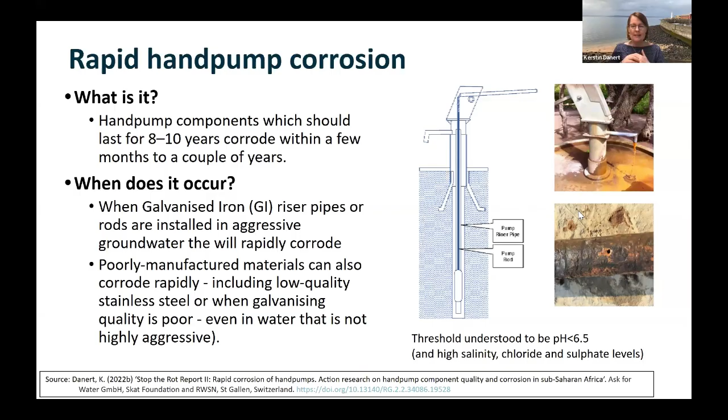And you put this so well, Fadzai. This problem has been around for a long time. It's a persistent and a pernicious problem, a problem that just doesn't seem to be going away. And we've had this in Africa and other countries for decades. In 1987, the late Saul Arlosoroff, working for the World Bank, with the hand pump project of the decades, concluded that this was a widespread and a much more damaging problem than people had thought.

That was in 1987. And also in 1987, the late Otto Langenegger did some phenomenal work. He estimated that about two-thirds of the breakdowns in parts of Ghana were because of corrosion. And he reckoned then that about 30% of hand pumps in Niger and southern Ghana were rarely used or were abandoned due to this high iron. And of course, people end up abandoning those sources.

Now, the Berlin Wall came down 2 years later in 1989. And that is me at the Berlin Wall not doing a very good job. It wasn't a very strong hammer, but it was a long time ago.

But this is still going on. So the wall's down. We no longer have this Cold War scenario, but we still have the corrosion problem. If we go to the next slide, please. So where is it a problem? In my publication from 2022 for Stop the Rot, over 20 countries in sub-Saharan Africa were documented where rapid corrosion was happening or had happened through observations.

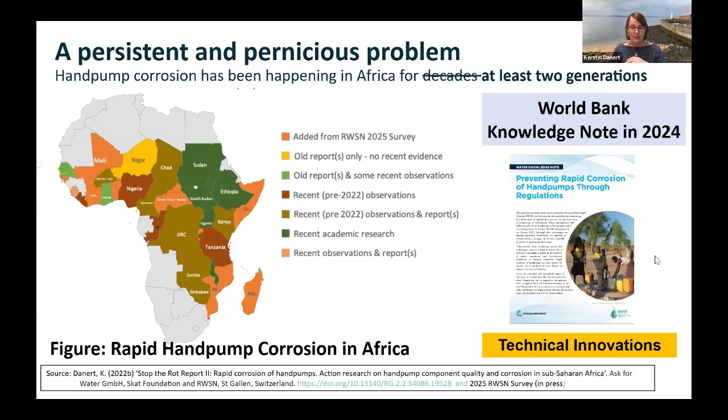And Michael and Daniel will talk about policy issues around that. So without any further ado, hand pump corrosion has been a problem for at least 2 generations. Let's see what we can talk about today to try to get it solved. Back to you. Thank you very much, Kerstin.

That was some detail about the history of the corrosion problem, and we see that it really has been around for a while. We're going to move on to our next presentation, which is from Gael Jenny Fleurant, who is a PhD student in environmental science at Rutgers University. Jenny has a master's degree in environmental engineering as well as a bachelor's degree in environmental science. Over to you, Jenny, and take us through your presentation on corrosion control.

Thank you so much, Fadzai. Hello, everyone. My name is Gael Jenny Fleurant. I am a first-year PhD student at Rutgers University, working with Dr. Siddhartha Roy. I am really interested in understanding and solving corrosion and corrosion control problems in decentralized water systems. I'm interested in both the infrastructure and the health aspects of it.

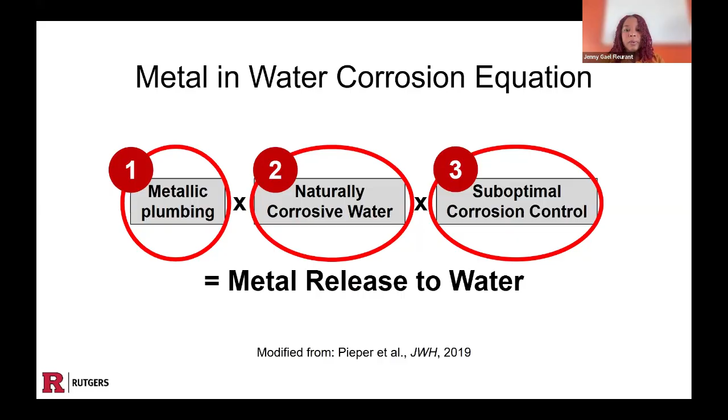Thank you. So in order to understand corrosion, it helps to look at different plumbing materials and see how they behave when they come in contact with water. So first we have iron and galvanized steels. These are very common in wells and hand pumps. They corrode by forming rust, which will lead to the red water problems.

And then we have copper. Copper corrodes very differently. It tends to pit, meaning it forms tiny holes that will grow over time. And it can also release the blue-green soluble copper in our drinking water. Next, we have brass, which is a copper and zinc alloy. There's a picture at the bottom here of a brass tap.

Usually it tends to appear safe, but it undergoes dezincification, which is when zinc will selectively dissolve, leaving behind the copper-rich structure that will then corrode as copper. And also brass can have some trace level of lead that can leach into our water, potentially causing health problems.

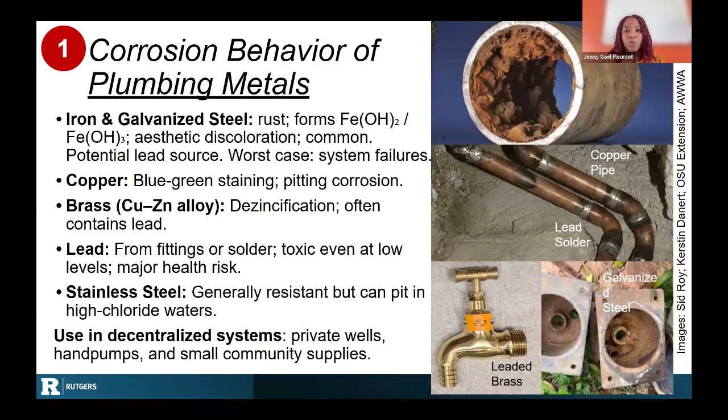And then we have lead, which itself is one of the most dangerous contaminants in drinking water because it's toxic at very low levels. There's no safe level of lead that has been identified in drinking water. So it's really bad and it will cause very dangerous health problems. And even stainless steels can corrode at the right chloride conditions. So all of these materials are used in decentralized systems, and it helps to understand how they behave when they come in contact with water.

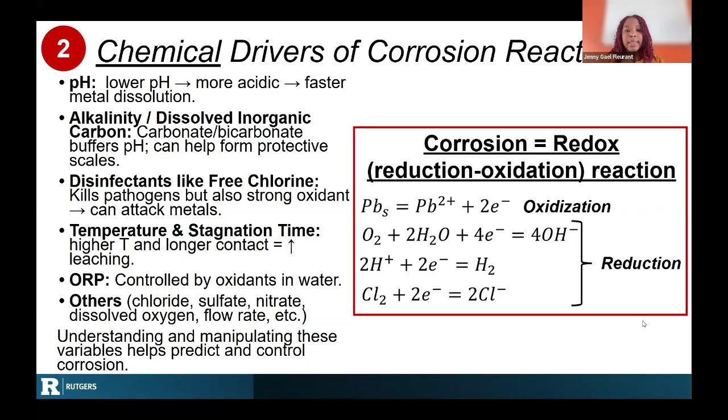So this brings me to this project that we've been working on. It's a critical review of corrosion and corrosion control problems in decentralized systems. As we know, public utilities have decades of corrosion control research. They have clear treatment guidelines and regulations, but decentralized systems, which serve hundreds of millions of people, are still under-researched. So the review that we are developing will synthesize more than 40 years of work on iron, lead, and copper corrosion across different water chemistries.

It will compare findings from high-income countries with low and middle-income settings, as their water quality and material selections can be very different. So the goal is to come up with an integrated framework for understanding corrosion control in decentralized systems. So what is known, what works, what doesn't work, and where the major gaps are.

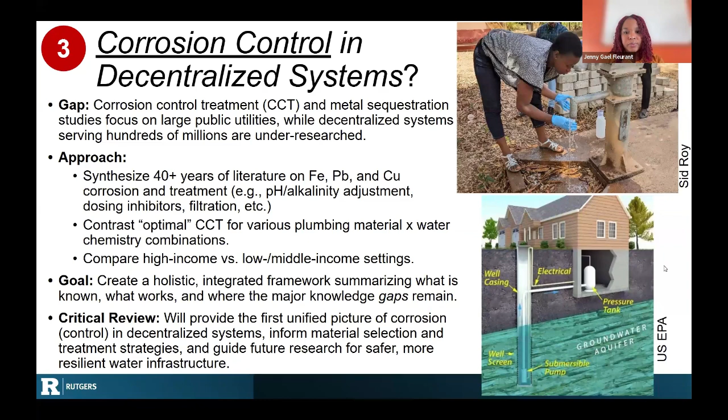Thank you. Thank you very much, Jenny, for the chemistry class. That was very crucial in educating us on the chemistry behind corrosion. We see that there's a critical role that water quality has on corrosion of the pipes and rising mains of hand pump systems. So thank you very much.

We're going to move on to the next presentation, and here we're going to have a presentation from Dr. Donald John MacAllister, who is a senior hydrogeologist at the British Geological Survey. He has research interests in rural water supply and more widely in global water resources. So I will hand over to Dr. Donald John MacAllister as he looks at the corrosion risks for rural water supply.

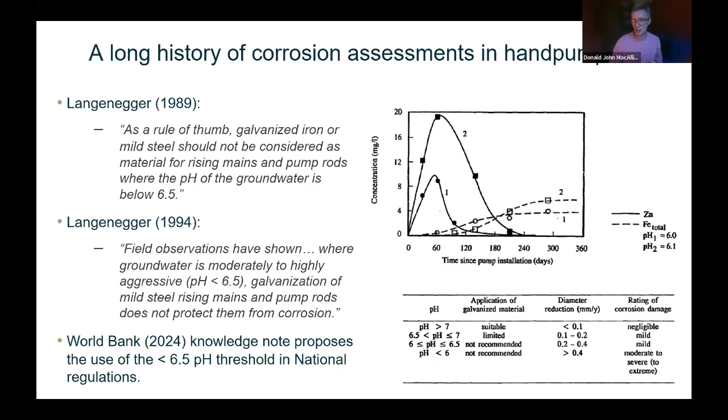So there's a lot of work done back then, but this pH threshold of 6.5 is still very much widely cited as a key factor for corrosion risk, and most recently has been cited in the World Bank Knowledge Note on corrosion, and they suggest that it should be built into national regulations. So we really need to understand, how effective is this pH 6.5 threshold as a predictor of corrosion, and are there better predictors? So maybe we could go into the next slide again, please.

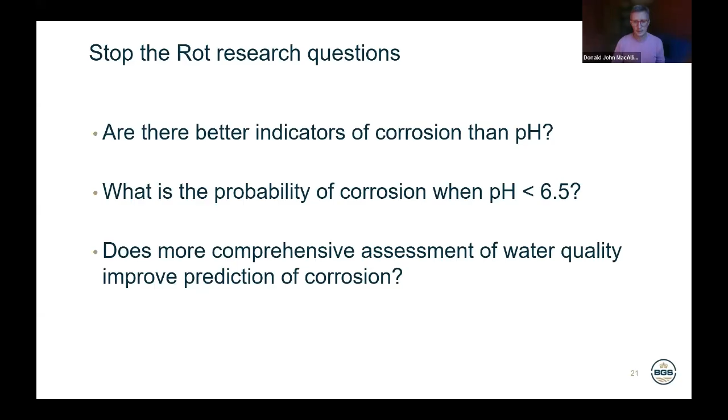So as part of Stop the Rot, we had sort of 3 research questions that we wanted to ask. The first is, are there better predictors of corrosion than pH? What is the probability of corrosion when we have pH less than 6.5 and vice versa above that? And what about a more comprehensive assessment of water quality? Does that help us improve our predictions of corrosion? So can we go into the next slide, please?

So this is just the high level results that we got, and the plot here really shows the pH values across the 145 sites in the 3 countries. It's shown against functionality categories, but I won't go into that in any real detail today. The main thing to point out here is that generally pH is quite low across all 3 countries, and you'll notice in Uganda in particular, almost all of the sites had a pH less than 6.5. So by that standard, in Uganda, almost all sites are at risk of rapid corrosion.

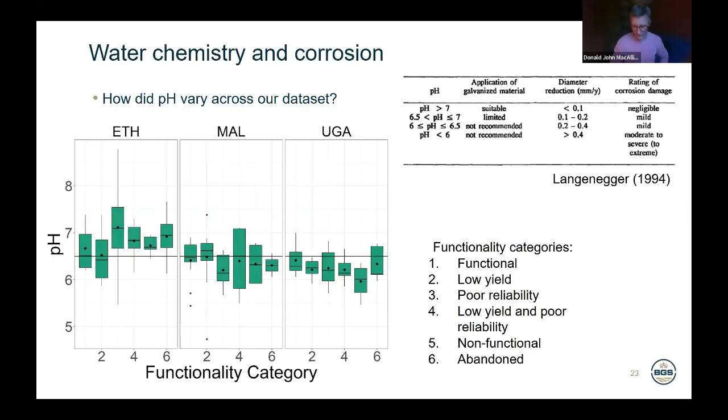And in Malawi and Ethiopia, there's a bit more variability, but there's still a significant proportion of sites that have this pH value less than 6.5. But actually, if you then go back to the risk table that Langenegger developed, he said that anything below pH 7, there is a risk of corrosion happening. So you can see that in almost all of these sites, we are expecting to see some corrosion. It's just the rate will vary. So maybe we could move on to the next slide, please.

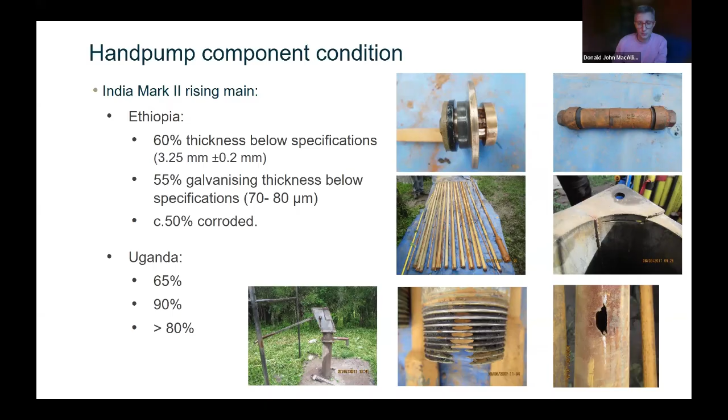So again, just a bit more background results from Ethiopia and Uganda, where we had India Mark II rising mains, and some of the observations that we found. So we found that in Ethiopia, about 60% of rising pipe thicknesses were below the specifications, 55% of galvanizing thicknesses were below specifications, and almost 50% of the rising mains and rods that we observed were corroded. In Uganda, that was much higher, so 65, 90%, and 80%. So more than 80% of the pipes and rods we observed in Uganda were corroded. So yeah, if we can move on to the next slide, please.

So we then looked at some of the corrosion indicators that are used quite widely, and we looked at how the values of those indicators that we calculated related to our actual observed corrosion. So there's 4 indicators here: the Langelier saturation index, which accounts for calcium concentration, alkalinity, temperature, and total dissolved solids, so the salinity level; the Larson-Skold index, which accounts for sulfate and chloride; then the Ryznar stability index, which is a kind of variation of the Langelier index; and then the pH less than 6.5 threshold.

So you can see for the first three, for the Langelier, the Larson-Skold, and the Ryznar stability index, at all the sites, when we calculated these indicators, all the sites were in the risk area for corrosion. And you can see, for example, for the Larson-Skold indicator, there wasn't really much difference in terms of our observations of corroded or not corroded. So these indicators are telling us something, but the main thing they're telling us is that at all these sites, we're at risk of corrosion.

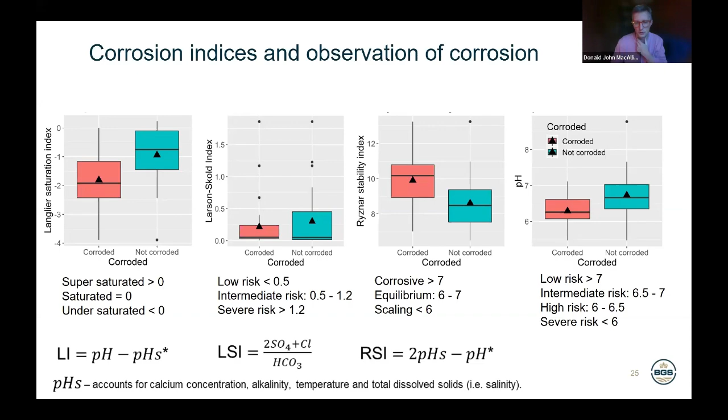But then when we looked at pH 6.5, that threshold, we did see that actually the majority of the sites where we had a pH less than 6.5, we observed corrosion, and where we didn't observe corrosion, in general, they were above that threshold. So it's some evidence for the effectiveness of that threshold as an indicator of corrosion. So if we could move on to the next slide, please.

So then what we did was we basically built a sort of linear regression model to predict the probability of corrosion based on a number of different variables. So we looked at a number of different pH thresholds, including pH less than 6.5. We looked at each of the corrosion indicators that I've just shown you, the Ryznar, the Larson-Skold, etc. And then we also looked at, if we put all of our water chemistry results in, including chloride, sulfate, salinity, does that improve our predictions?

So we had a very large data set of more than 3,000 observations of downhole components from our 145 sites, so we had good statistical power to be able to do these predictions. And what we found was that pH 6.5 was the most effective single binary indicator for predicting corrosion. We found that the probability of corrosion when pH is less than 6.5 is 61% for rising mains, similar for rods. And the corrosion probability when pH is greater than 6.5 was 30%.

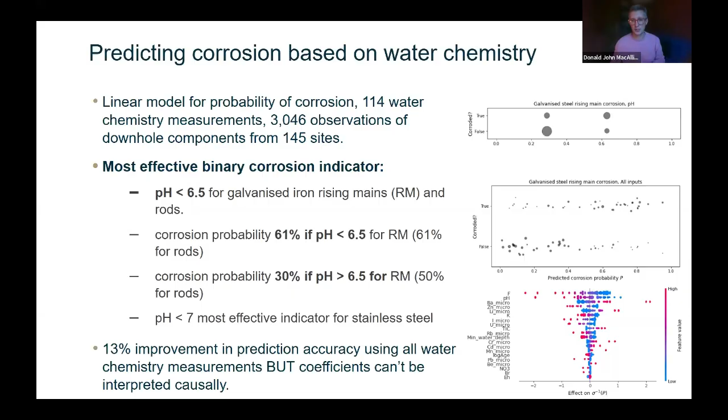So while this pH threshold of 6.5 is an effective indicator, it doesn't mean that when you have a pH above that you're not going to see corrosion occurring. We also then looked at the full model where we put all of our water chemistry results in, and we did see an improvement in our prediction of corrosion, but it was quite a small improvement overall, only a 13% improvement. And actually, one of the main factors out of all of those water chemistry indicators was still pH in the models where we had everything in. So this is really good statistical evidence for the effectiveness of pH 6.5 as a predictor of corrosion in rural water supplies. So maybe we could move on to the next slide.

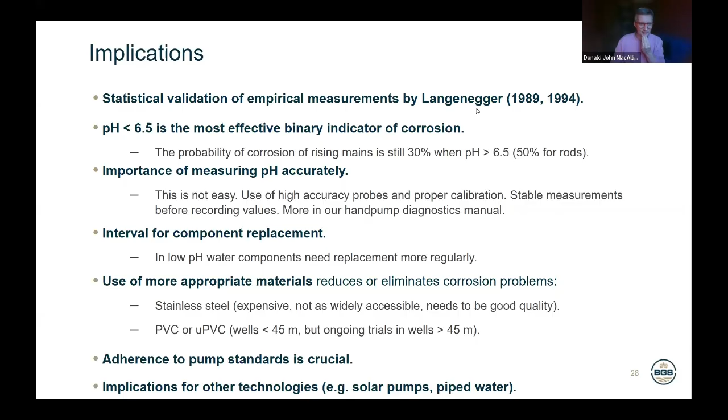Thank you very much, Dr. Donald John MacAllister. To the audience, I hope that you've enjoyed the last two presentations, which have taken us back to the chemistry class. So from your research, what I'm picking up is that pH is the most critical risk factor for corrosion when we're looking at water chemistry. And that as long as we have a pH that is less than 6.5, that has a greater probability of actually having rapid corrosion. And that was very insightful. Thank you very much. And so that brings us to the end of the first segment.

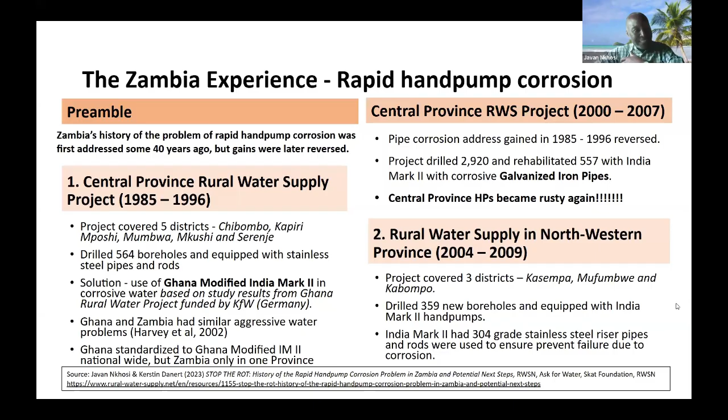So basically, this was another gain. Next slide.

The third project which I want to talk about is the groundwater development in Luapula Province. This was from 2007 to 2016, under the support from JICA. This was done under 3 different phases, and a total of 567 AfriDev pumps with PVC riser pipes.

And these were basically able to be used without being corroded, because they are using UPVC riser pipes. In some cases, they're also equipped with stainless steel riser pipes due to the low water tables.

During this project also, they did what's called the pipe replacement study, where they picked up 20 sites in 11 districts, as you can see in the map of Zambia shown. Of these, they're able to come up with the recommendation that in acidic water, which is basically aggressive water, with different dynamic water levels, you can either use AfriDev or India Mark II with stainless steel riser pipes.

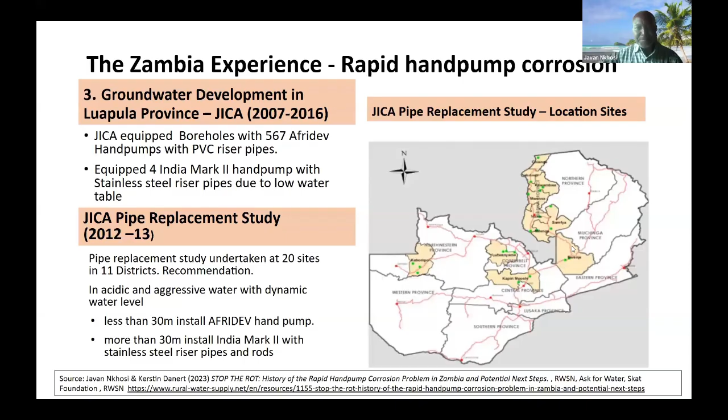World Vision has done some work here in Zambia since 2010, with a bit more emphasis with regard to rural water. World Vision have been using stainless steel riser pipes on the India Mark II since 1993. This goes back to their history, as World Vision started work here in Zambia in 1981. So far, World Vision has drilled and rehabilitated more than 8,500 hand pumps.

All these, they use stainless steel riser pipes. So meaning all these other years in the past, with regard to World Vision, it's only stainless steel all along.

The second example I want to highlight is UNICEF from 2020 to 2022. With regard to UNICEF, they also have gone in to do only either new boreholes or rehabs. All of them use stainless steel riser pipes.

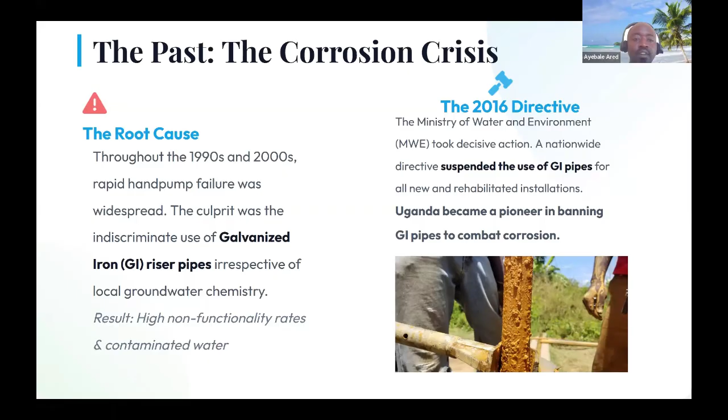Looking at the 2016 directive, I have to appreciate the role of the Ministry of Water and Environment in Uganda, where a directive was issued nationwide, suspending the use of galvanized iron for all new and rehabilitated boreholes. This made Uganda one of the first pioneers in banning galvanized iron pipes to combat corrosion.

Looking at the past, we appreciate from the previous presenters that one key culprit of corrosion is the indiscriminate use of galvanized iron riser pipes. Crucially, they were used irrespective of the local groundwater chemistry, in areas with aggressive water, where these pipes quickly failed. The results were devastating, with high non-functionality rates and contamination of water, where we have a lot of red water coming out of bores in the mornings.

Moving forward, this directive was followed up with new national protocols where the Ministry of Water and Environment now promotes corrosion-resistant alternatives, setting stainless steel grades, especially 304 and 316, and UPVC as the standard materials. The key change is mandated by the National Borehole Drilling Specifications of 2018-2021, where water quality analysis is mandatory before material selection.

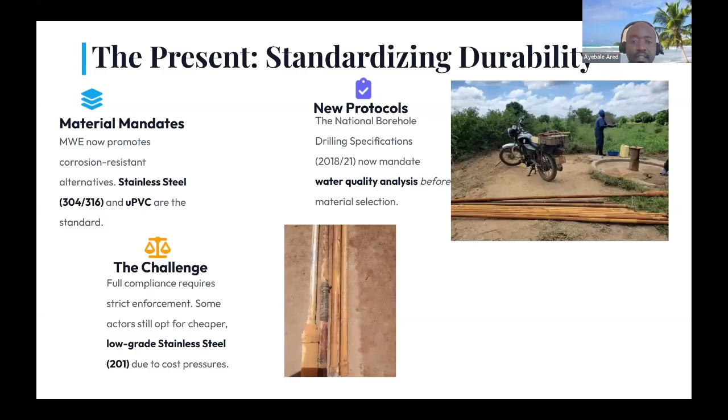As WHH, we had to operationalize the Ministry of Water and Environment policies by making the site chemistry, or water quality testing for ambient conditions at the site, the deciding factor for installation materials.

What happens is that drilling supervisors at the site during pump testing have to move with pH and EC meters. As they are pump testing, we measure the water quality in terms of electrical conductivity and pH. We do this because we don't want compromises from transportation, since a few chemicals may change the quality. So we want to get the real ambient conditions of the aquifers, that's why we prioritize having mobile test kits at the site.

When we test the EC and pH at site, that's where we recommend which materials to install. Especially when we have aggressive water, where pH is less than 6.5 and electrical conductivity is greater than 500, we strictly go for stainless steel riser rods and always recommend 304/316 stainless steel grade. For moderate or less aggressive water, where pH is greater than 6.5 and EC is less than 500, we recommend UPVC with stainless steel couplings and stainless steel rods.

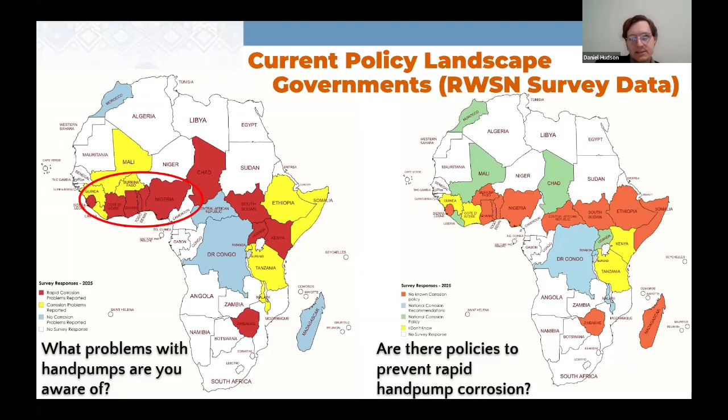On the right, you will notice that under 20% of countries have any sort of regulation or even recommendations around hand pump corrosion policy. There is a correlation between the countries lacking regulation and those reporting corrosion problems, but that could be due to respondents who know more about corrosion knowing more about policy as well. The key takeaway is that most countries rely on general water quality standards to govern hand pumps, and I will show you in a minute why general quality standards are insufficient.

Next, please. NGOs are responding more strongly to the threat of rapid hand pump corrosion, and my research has not yet uncovered exactly why, but it may be due in part to the difficulty of enacting law in contrast to changing organizational policies. In addition, governments tend to want a lot more data before they enact big policy change. Next, please.

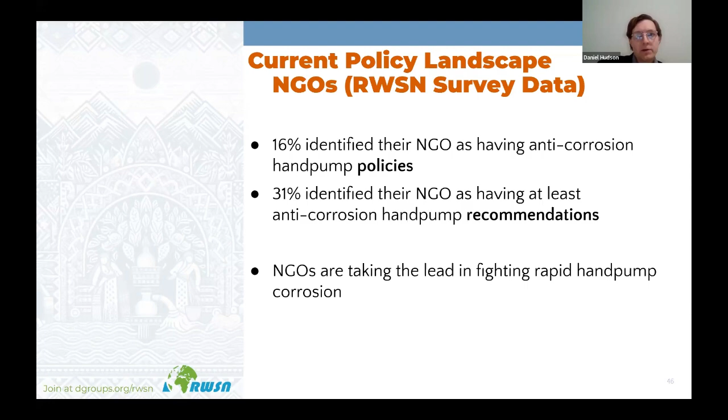I spoke with Albert earlier this year. He's an NGO staffer working in rural South Sudan. He told me that of the 200 repairs he and his colleagues have conducted since 2023, every single repair except for one involved replacing pipes, rods, or both. These are the components which should last the longest, but his team is spending most of their time replacing these pipes instead of conducting other repairs.

He told me that one of their biggest challenges is cheap, low-quality corrosion parts flooding the market. The free market is not able to address this problem, and regulation of some sort is the only way to make rapid hand pump corrosion a problem of the past. Next, please.

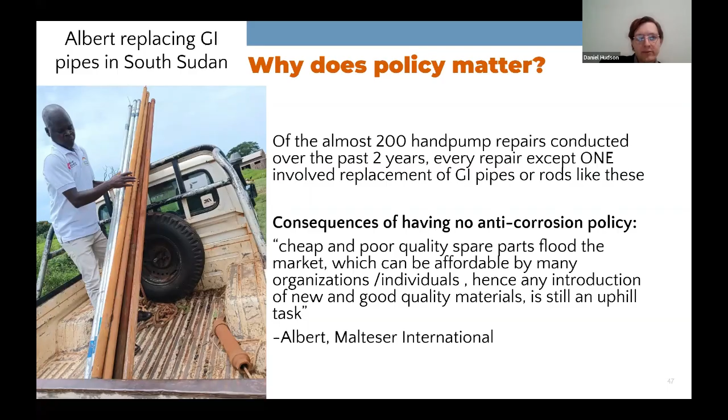Next, please. Myself and various individuals are trying to bring corrosion data to government staff, who require a lot more data to change policy. If you do have any hand pump repair data which you can share, please reach out to me. There's a team in Uganda piloting a new type of corrosion-resistant PVC that can operate down to 60 meters with PVC risers, to a team in Nigeria which piloted a data gathering project to track pump breakdown causes. Michael Thibert with the World Bank is now going to be sharing some solutions on monetary tools which can be brought to bear to solve rapid hand pump corrosion. Thank you.